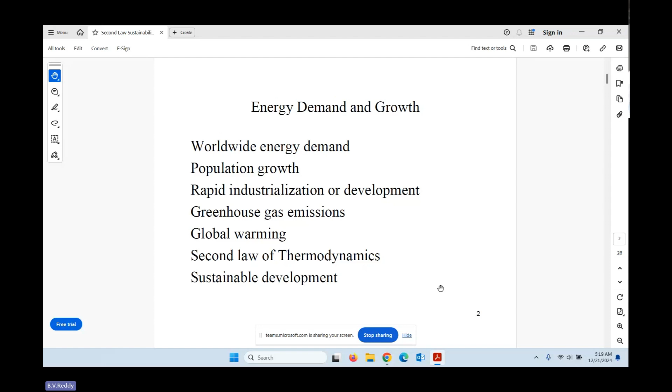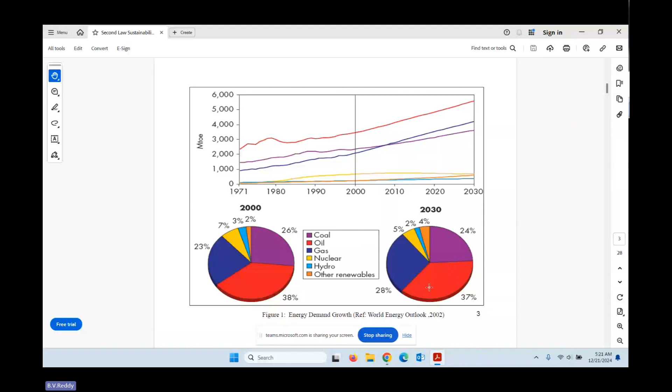Okay, so a lot of times when we teach or when you read thermodynamics, you see laws - first law and second law. We know the first law of thermodynamics, which is the law of conservation of energy, which talks about energy balances. It only talks about energy balances. It doesn't indicate or bring out anything related to the quality and direction of any energy process or source. Now if we go to the second law of thermodynamics, that's what it's going to tell you.

Typically those two, that is the quality and the direction - that's where we come across what you call entropy, which is a very classic concept, and entropy generation. And as I said, from at least the last 15-20 years, the term exergy is used a lot.

I'll tell you, in this lecture when I go to the second part, I will show you the details related to exergy and exergy analysis - why it is gaining importance and what the consequences are in general for engineering systems design, overall on environment and sustainability.

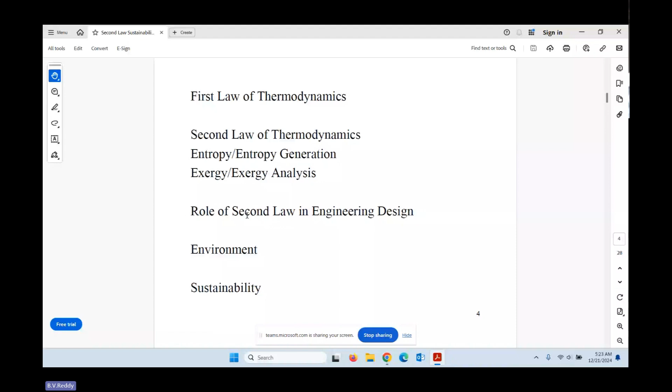So the idea here, as I said, is my focus is to show you the developments, to show you the role of the second law in sustainable development, and also show you opportunities where there are a lot of research areas that we as faculty, or you as a faculty or graduate student, depending on your role, can explore to work on.

Okay, so in this typical steam power plant, which you have an idea of - this is the technology that is utilized even today in a big way, starting from 1882 when the first power plant was built to generate power. So we have here a boiler, turbine, condenser, and a pump system, all coupled with the electric generator.

The whole idea is this operates on a modified Rankine heat cycle, and a lot of work is going on. I'm not trying to teach you the analysis or details here, which most of us know. Now, even today, people do research - there are a lot of research papers, people conducting research whether it's on the cycle, efficiencies, parameters, multiple heaters, reheaters, all those things.

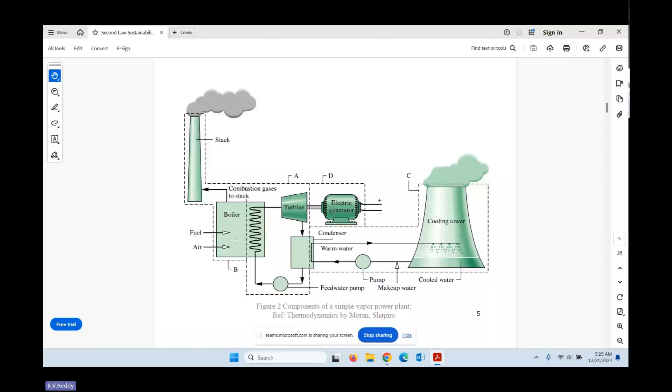So the whole idea of all these along with co-firing is to reduce emissions. Now the question is, what is the role of the second law? As we see now, maybe I'll put these advantages next.

Now, the thing you should notice here is, till the 80s, these gas turbines' blade materials and their range of operating temperature was very low. Later on, there were so many advances that today we have gas turbines where the inlet conditions are as high as 1350 to 1375 degrees centigrade.

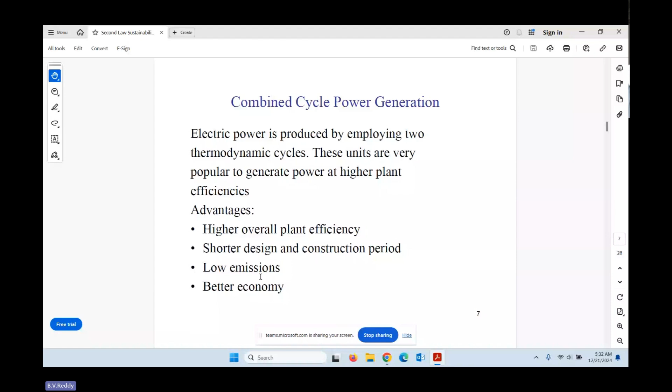Now, what is the benefit for you as an FDP attendee? There are many areas that still need to be explored. How can emissions be further reduced from this type of plant? Is there room to have natural gas with biomass still operating in combined cycle mode, in co-firing? Yes. And there are many other biomass parameters, and the role of all those, including emission reductions and economics. I will show you some sample research and how different parameters influence the outcome.

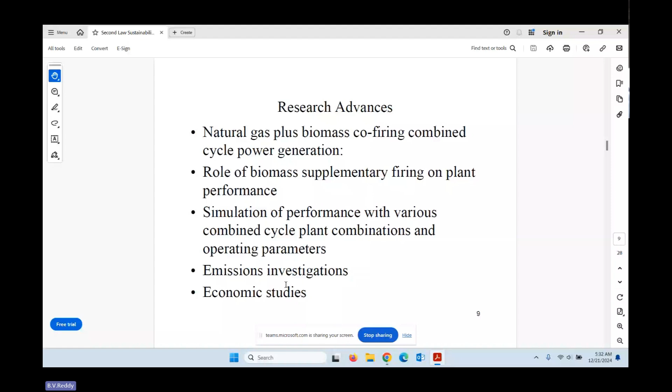As far as the analysis is concerned, if you use the basic first law, second law approach, we can derive all the equations, create a code, and run it. I'll show you now.

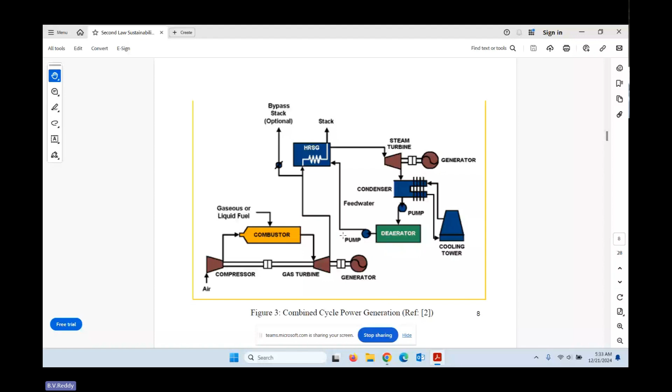This is where you have a lot of room to do further research afterwards. I will email three selected papers - I already told the coordinator, Professor Kumar. This is one of the papers I will email so that all of you will get it.

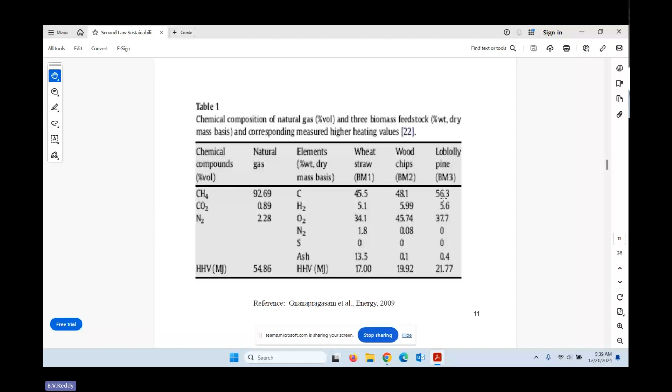As you can see, I think it comes in the next slide... oh sorry, it did. The results aren't put here, but they are available in this paper, which I'll email. But what I am saying is there's a good amount of CO2 reduction when biomass was co-fired with this combined cycle. So this is how a combined cycle is transformed into a co-firing mode, not only to utilize the second law for better efficiency, but to reduce emissions by co-firing biomass.

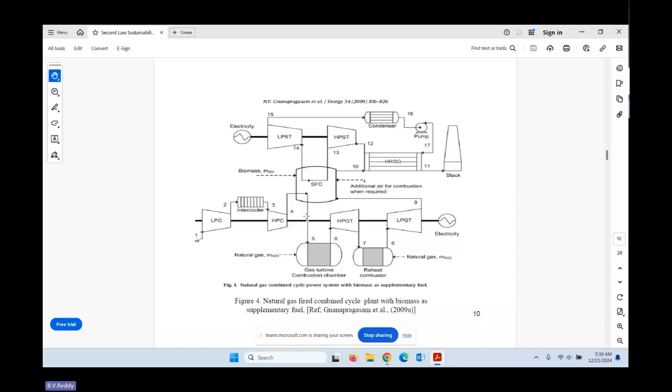Okay, so then what other ways? As I said, ultimately today, whatever we talk about in energy and engineering in general, we focus on sustainability. You hear this word a lot, no matter the engineering field - sustainability and sustainable development are very common terms. So then, what other forms?

One has to investigate. You can't say just like that it goes down this way or that way. As we know, solar energy is intermittent. Solar energy is available only typically 10 to 12 hours. So when there is a lot of energy, is there a way to store and utilize it?

What is the role of energy storage? These are not things that can be discussed in 10-20 minutes. Even each topic is covered in many places like courses, whether undergraduate or graduate. The whole idea I'm trying to say is some of these topics are research areas where people are actively working.

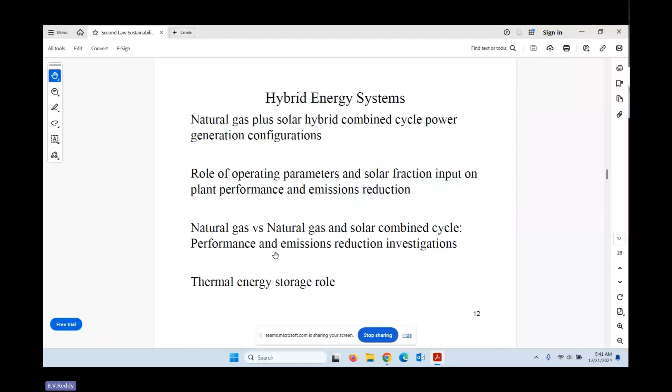Okay, let me explain two more slides, then we will have a little interaction, please.

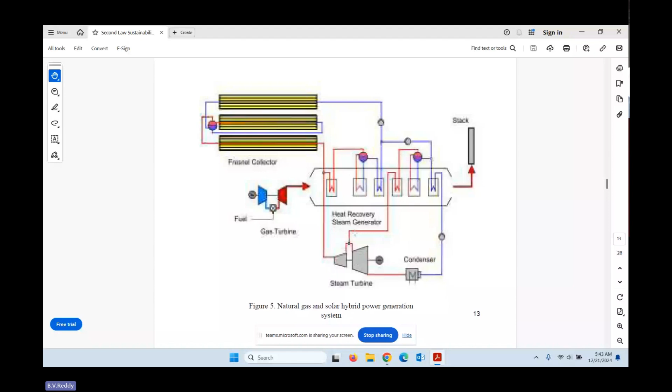During those hours solar is not available. I'm talking about the all-thermal route, and biomass helps to take care of that time. So again, this is hybridized. The whole idea is, if you see here, how solar is brought in and how it can be utilized in a hybrid mode. This is a hybrid — it's not co-firing, it's hybrid mode. The whole idea being improving efficiency, utilizing renewable energy, and reducing emissions.

Again, here the same thing. Okay, so I think before I continue, does anybody have any comment, any question? Maybe I can clarify, if there is any, please. Okay, if not, I'm going to show you the continuation.

Particularly if you see countries like China, US, India — why I mention these three countries is, I think now India comes in order one. Earlier people always used to say China is most populated, but now I think India is most populated. So India, China, USA — what is common with them is these three countries are probably the most energy consuming countries on the globe now, because of their size, growth, and development. At the same time, the surprising thing is these three countries have a lot of fossil fuels, and coal is one of them.

Now, a lot of them utilize coal through steam power plant technology. However good the technology may be, there is a lot of efficiency limitation because it uses a modified Rankine cycle. Whereas the combined cycle, the way I showed you, is the most efficient, given how the engines are arranged.

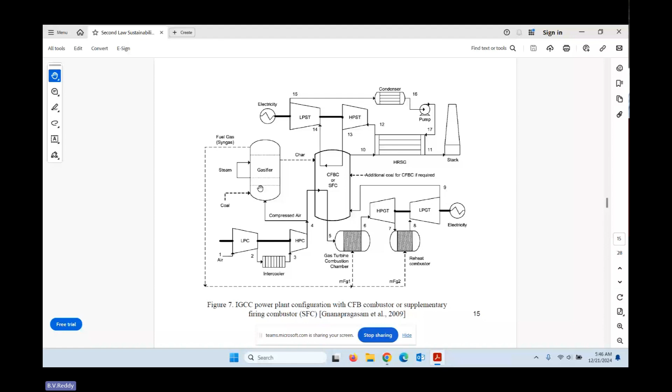Then the waste heat from the turbine system is utilized in the bottoming steam cycle with the steam producing mechanism, turbines, generator, and all other components. So meaning is, this coal, a solid fuel, is converted into a gaseous form, clean. Now we are running a combined cycle, meaning a gas cycle on top and a bottom steam cycle, bringing down to that combined cycle, which is the efficient form. This is what is IGCC, integrated gasification combined cycle. Even in India, a lot of research happens, but there are only a few power plants still, because a lot of research is ongoing, and in the future these are definitely going to come because of their heavy advantages, including high efficiency.

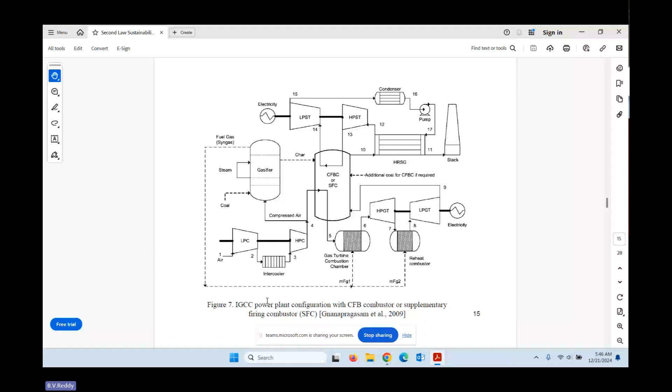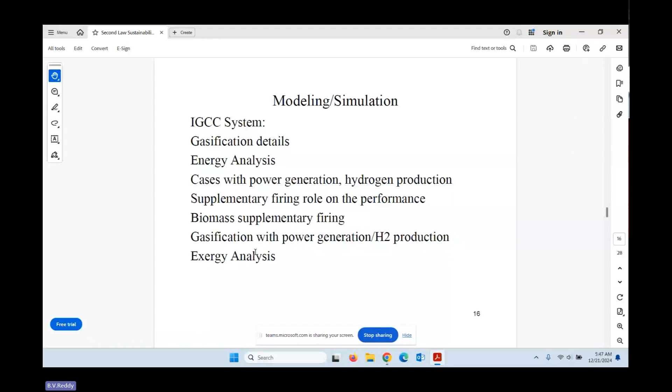Now the question is, for a researcher, for a professor, what is the opportunity? There are a lot of opportunities. People do a lot of research. Even I'm telling you, with masters or PhDs, we did a lot, we published. Not only me, everybody publishes. When you are in a teaching profession, part of the profession involves doing research and publishing. So there are many areas, from gasification to conducting the performance, to systematic combination of these systems. You can have many varieties of how you propose this integration of components leading to the IGCC form. So supplementary firing, all these, it goes on. I think that's where a lot of opportunity and research purpose lies.

Is everything okay? Are you able to hear me?

Now from a thermodynamic point of view, we are talking efficiency. There could be cost, other things to consider. So meaning, again, there's a lot of research that needs to be done. That's where a lot of research is going on. And even whatever is shown here...

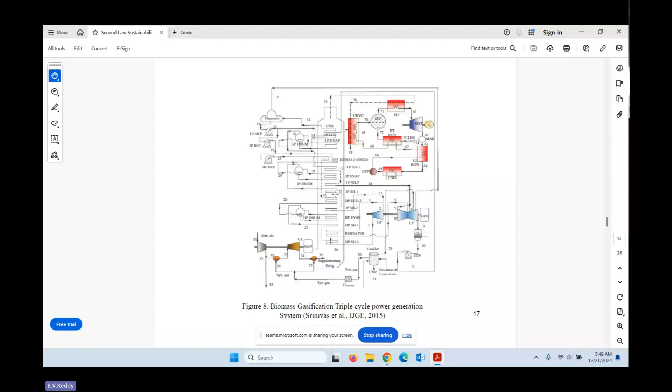...is conducted by Dr. Srinivas, a professor at NIT Jalandhar, who is a collaborator with me too. So this is one of the works. But the idea here is it's not about whose work it is. There is so much opportunity for research, thermodynamic analysis, the role of different parameters, all these things going on. So the whole story goes like this.

These triple cycles are given from a second law point of view. When you derive a general combined overall efficiency expression, it goes on. So we need to look into many sides, including economics. A lot of research, a lot of effort is needed on that.

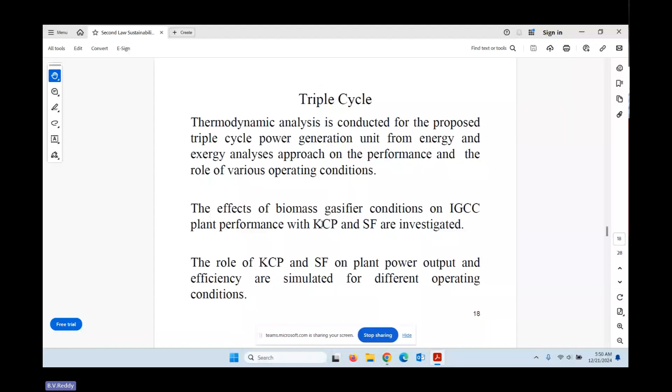So now please observe, I started with a steam cycle. I went on to combined cycle. I went on to co-firing mode of combined cycle. I went on to hybridized version of combined cycles. Then I went on to adding energy storage. Then next I showed you in the last two slides, the triple cycle. So see the sequence, all these are based on the second law.

Now next we are at the heading called multi-generation or integrated energy systems. In my second lecture, when I talk about advanced hydrogen systems, there is one system I will talk about. But here, multi-generation means we are trying to produce many things, not only power, but process heat and some other things. So the whole idea is the way these multi-generation or integrated energy systems are arranged, they will produce very high performance, high efficiency. So what is the benefit we are going to get? We will have much reduced emissions, even when we are talking about utilizing natural gas or coal, which are fossil fuels. And not only that, a lot of these systems are coming where people are doing research.

This is a big area now - how to capture carbon dioxide, what to do with that carbon dioxide, and how expensive it is, what is its economics. The lines written here mean developments towards integrated systems, performance simulation, emissions investigations with various combinations of carbon capture - each is a question mark where we need to do research. You cannot have answers in one minute for systems like this. Otherwise we could have solved the world energy problems, emission problems, sustainability problems long back. So this is where we have a lot of opportunity.

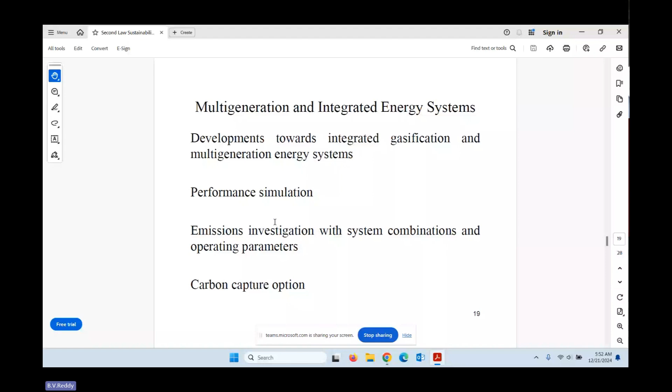Now I am into the second part of this lecture. As I showed you in one part how the systems are getting developed, energy in general - because I have to choose only energy due to time - now in the second part, you are going to see how the second law benefits when we compare with the first law. We teach both laws to students for engineering systems.

As I already said, I'm not here to teach you first law, second law basic meanings - we are all familiar. But how does the second law play a role in research, in engineering systems and developments? So first law, we know the traditional approach - we go with energy balance, do the things, write a code, get the details.

Now if you look at second law, why do we worry so much? What does it benefit? As you recollect, the second law is the one which gives how a process happens in engineering. It gives you direction, and then it brings about quality through irreversibilities. We all know what those irreversibilities are.

Then what is the benefit that we are going to get by doing this second law analysis, which is also called exergy analysis? I'll explain what exergy means in a few minutes. It tries to tell you many things - overall the performance of not only a component but the whole system, from second law point of view, not from first law point of view. First law only talks about energy - it doesn't differentiate quality, which I will show you in a few minutes.

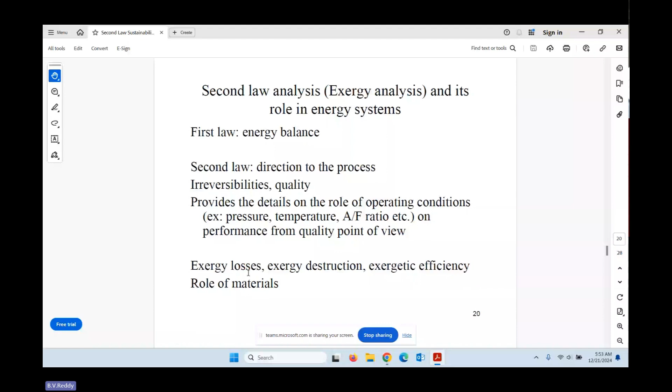Now comes then how do we do the second law analysis or exergy analysis. Every thermodynamic book now will provide you the approach. What I am saying is how to conduct exergy analysis or second law analysis - the approach is listed in every thermodynamic book, because what we do is I have a system. In a few minutes, I'll be going there.

Once for a given component, you have the state conditions, then you calculate the availability - basically a simple relation. If you see Professor P.K. Nag's book or Moran and Shapiro, you see this, and here these zeros represent basically the reference.

So once any system - let us say you have a gas in a combustion chamber - it can do something till it reaches that of atmosphere, where atmosphere means we represent a reference temperature. So that means there is still some energy available, but it cannot do anything - it's like dead. So basically how much availability is available, the potential from a high state, we can estimate. This is what is called a typical availability calculation function.

So now the question is, when you know the flow rate, you can calculate the physical exergy using this. So then what happens - as I said, I'll explain what it means using a system. Depending on the system, there is a physical exergy, chemical exergy. What exergy stands for is like this.

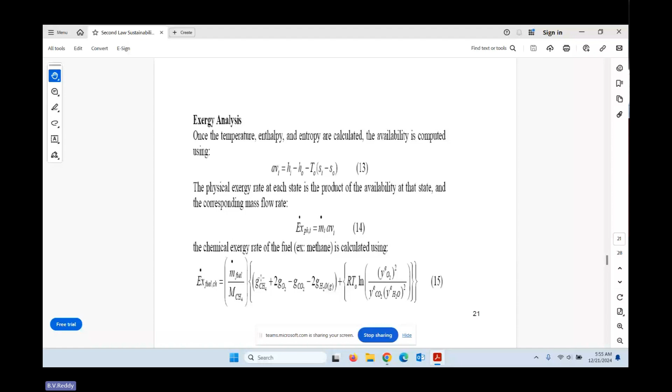So let me go to a system. Before I go to the system, as I said, in the analysis most of the time we neglect the kinetic part of exergy, the potential part of exergy - those are very small components. We consider physical and chemical, and that is where it is called total exergy input. Now pay attention, I just choose one of the systems.

How do we define energy efficiency? Energy output over energy input. We define exergy efficiency based on the exergy output to the exergy input.

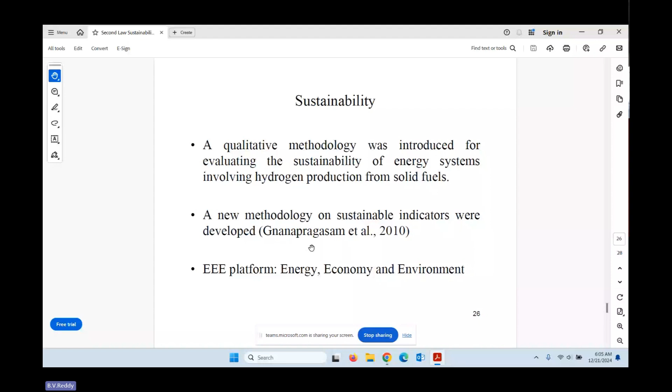So, almost I'm close to my first lecture. Now the question that comes is, as I have shown, taking few power plant configurations, taking one by one, I showed you the role of second law, how second law is helping the design and improvement of them as we understand better meaning of second law.

See, second law, first law, these laws were stated in 1850s. We are not reinventing them, but the second law meaning and its role - entropy generation, minimization, exergy - I think have received a lot of attention only from the 80s.

I should state here, I think a lot of the credit for better understanding of entropy and second law concept should be given to a great professor. His name is Adrian Bejan. You people might have seen a lot of his books. He's a great professor, he works in USA, and he has written so many books.

I think its initial importance was brought out by Professor Bejan. Later, everybody works, there are great people. Even Professor Nag has contributed tremendously on this side of it. Now also people are doing work on it.

So the whole story is this exergy analysis is leading to a lot of understanding and leads to development in engineering design, again performance improvement for all the systems. So we will be working to improve efficiencies, to bring down the environmental impact, and not just one system. I talked about multi-generation systems. We are at a stage where in many sites we talk about multi-generation to improve performance. And these are a lot of other things, conservation and leading to sustainability.

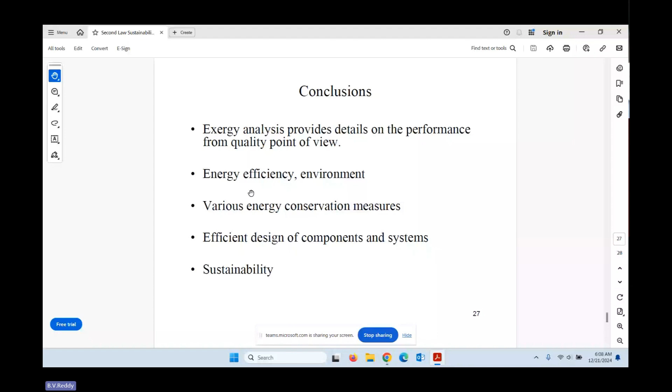So I think, are there any comments, any questions? Yes please, depending on what you have, I can go over it. Any comments, any questions? Particularly I am interested to engage you people for a few minutes here. Participants are requested to ask questions, please. I want questions from them so that it benefits the discussion.

I can go to any slide, you just mention me the slide, I can go back. If you have any questions, you can ask please. Okay, then I'll share one more. While you are thinking of a question, let me just pull it up on my screen, give me one second.

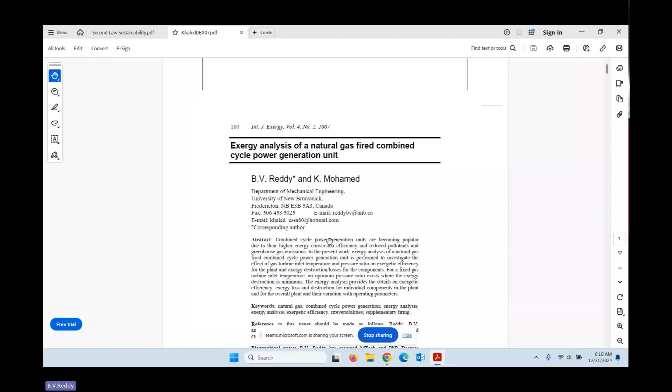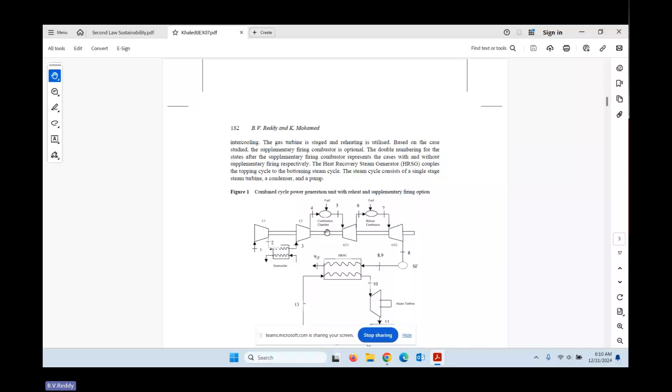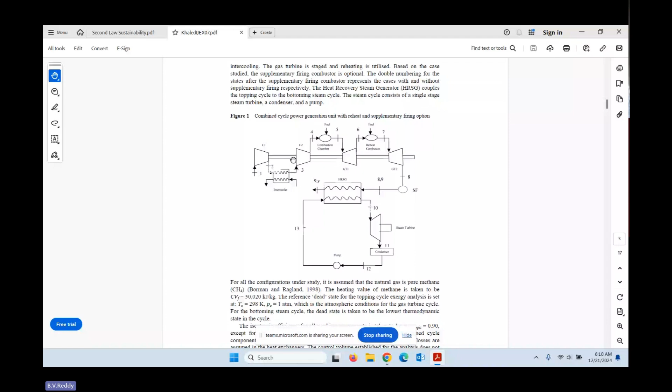See, the way I was showing you this exergy analysis, typically people teach these lectures in a classroom. So this paper also I'll be emailing to Professor Kumar. You can see the approach when it is done. This is the system, I tried to take 5 minutes to explain those details, but it's not really 5 minutes worth, please. These are done in thesis with months of effort. So you start from here, go around with each component, try to develop all the equations. You will get this copy too.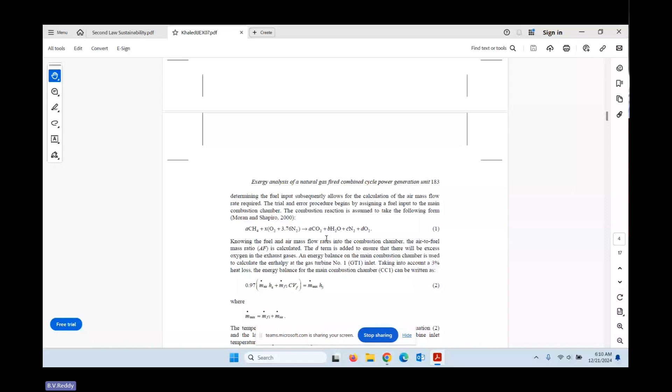So first energy analysis is considered. Look here, I know the screen could be small, but still you are able to see. We take the fuel, we consider air, then you propose a combustion equation. As you can see, these are the products, and you try to balance it to meet the gas turbine. That way we get air-fuel ratio details. Then we try to make an energy balance considering the enthalpies and calorific values.

This is the term that is related to the gas turbine inlet temperature. So then we will have... then we try to, you cannot see if you look here, this is the gas turbine. If this is designed for 1100 degrees centigrade blade material operation, to get 1100 we try to do iteration through a programming. Meaning, you set the limits of the gas turbine operation. These two equations are utilized and you develop a code to control that air-fuel ratio, to get to the required air-fuel ratio.

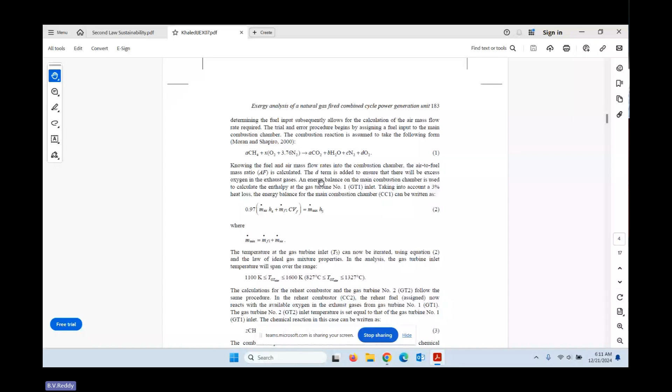Then comes, as I said, if I go back here, this is the reheat combustor. How do you know? Even if we supply some air, if there is a need, we are firing fuel, a lot of oxygen will be there, so we control this temperature. Again, look here, the whole idea of me showing this is, saying it is easy, but when we do the work, it's hard, it takes a lot of time, sometimes 6 to 7, 8 months, 1 year to get a good research work piece and then to publish it.

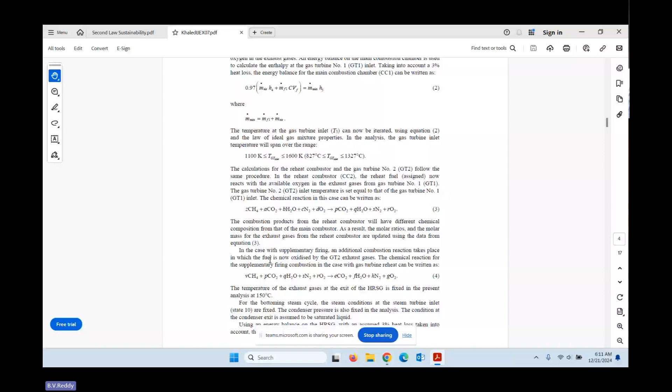So you can see this is the reheat, go on, you develop the equations, then the thing. Now you can see here the exergy, what I was showing you. I tried to show you in this presentation because I don't have the luxury of hours to show you all the details.

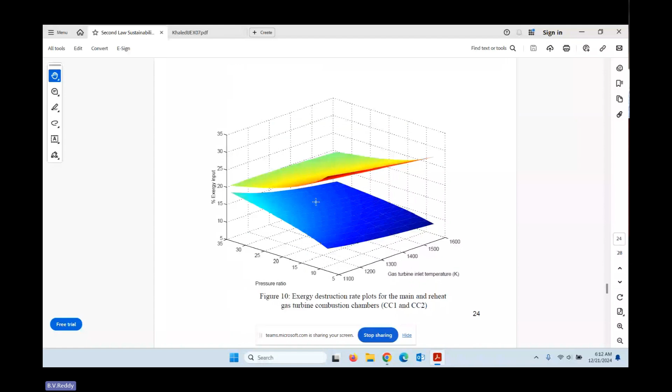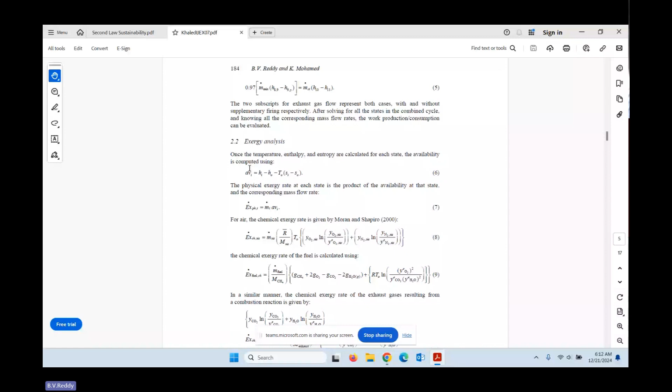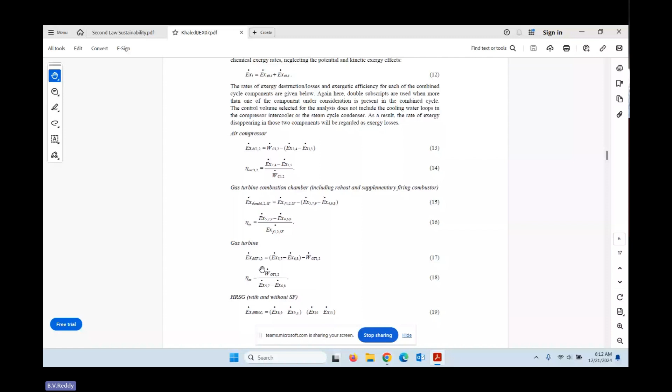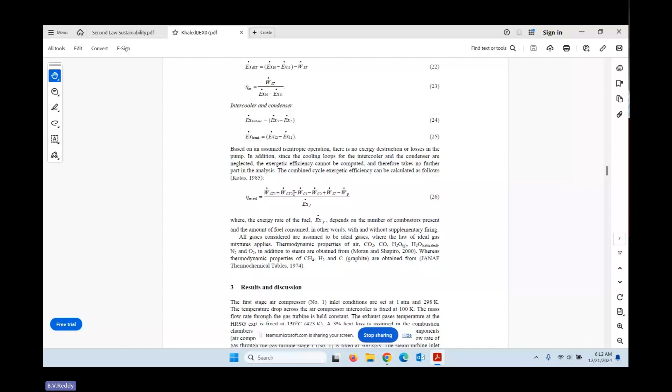I just put two slides. Here you can see every step of the approach is given, which you are going to get in this paper too - availability, physical exergy, chemical exergy. Then how do we write for each component, from compressors to turbine, how the efficiencies are defined. I had only the opportunity to show you one or two figures there.

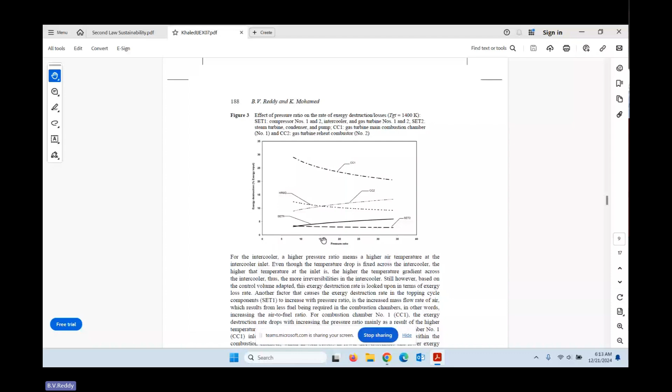This is very small on the screen for you, but the question is, if you take one parameter, let's say pressure ratio, and look at exergy destruction or exergy loss, different sets are represented here. For turbines, combustion chambers, heat recovery steam generators, we cannot understand completely without mapping them. We need to generate results through the code, then map them, and see for different combinations how the systems behave. They behave differently.

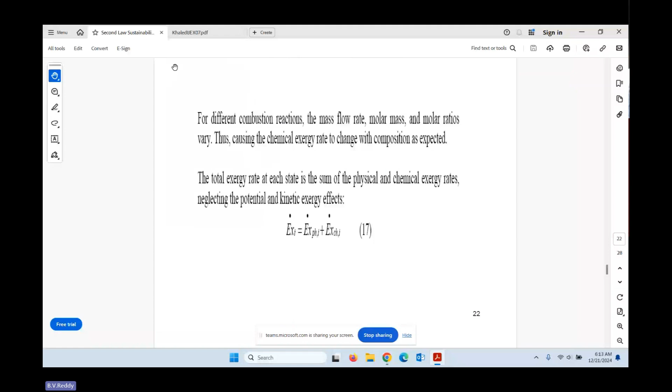So all these details were shown, so we get a better understanding. If you see this particular figure - it's a colorful one because I scanned it, so it went black, but now you can see it tells you the story. This article, which I'll be emailing again, gives all those details.

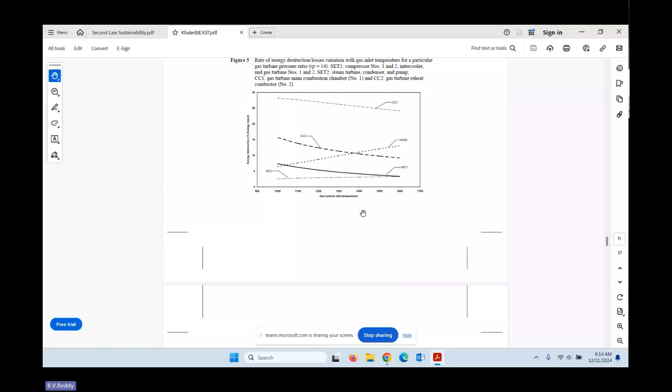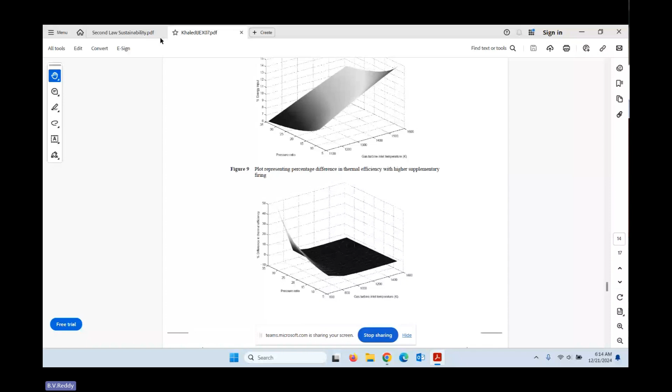So the whole point here is, for any system, if we do the second law analysis, it need not be a combined cycle power plant. Since I won't get the opportunity to talk about the second law in the other presentation, let me just take a little example, please.

Don't think the second law or exergy analysis is just for machines, power plants, hybrid systems, or other systems. Even as humans, how we utilize our time, whether in a day, a year, or in our lifetime, depends on how much success we achieve. If we account for time, the way we utilize it, we bring in irreversibilities. So we can define, even for us, efficiencies based on the first law and second law.

I'll just give this very briefly, I won't dwell on it too much. If you have eight or ten hours in a day you are working, depending on how you planned and utilized it, that makes the difference. Even imagine a school kid - this is, I think, one of the classic examples in any thermodynamics book.

Imagine a school kid who comes back from school and has two hours of time available. One hour for homework, one hour to watch TV or play. Let's imagine two cases: if school kid one watched TV first, then tried to do homework, versus school kid two, who did the homework first, then went to watch TV - there is a huge performance difference.

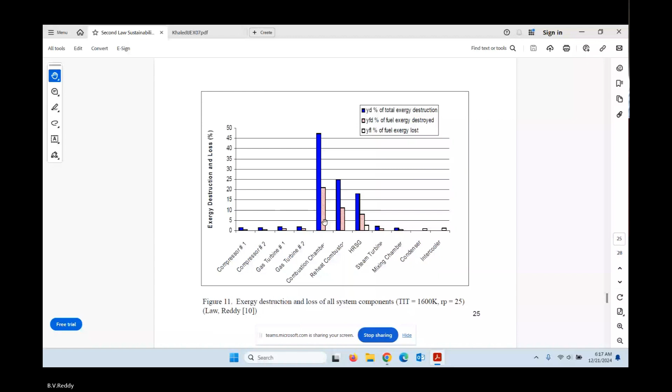I think still - I just want to give some time. If you have any questions or interactions, at least I want to hear. If not, I'll go to the second part of my lecture, please. Any comments, any questions? Okay.